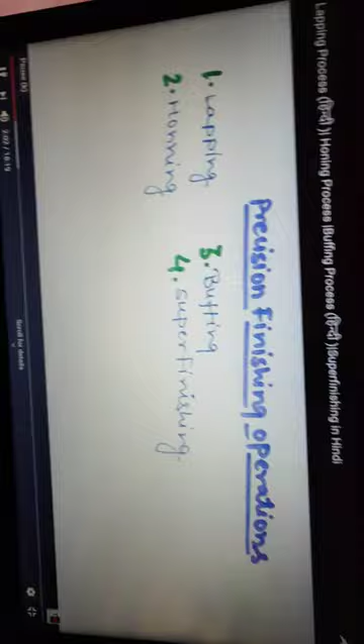So today we are going to discuss precision finishing operations, that is lapping, buffing, honing, super finishing, etc. Super finishing is an operation which is done after manufacturing of a product.

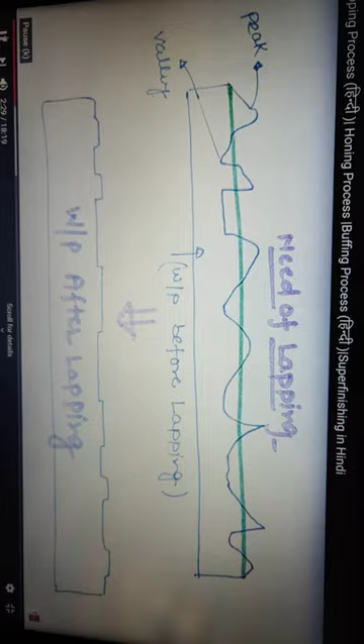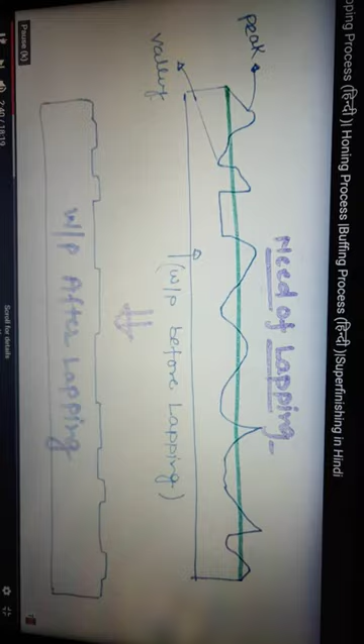So look at this. Why do we need lapping? The workpiece before lapping and the workpiece after lapping. You can see the major difference. The peaks and the valleys are shown clearly before lapping, and after lapping it is plain, or it is neutralized. You can see the difference between the workpiece before lapping and after lapping. It is a major difference that you can see in this picture.

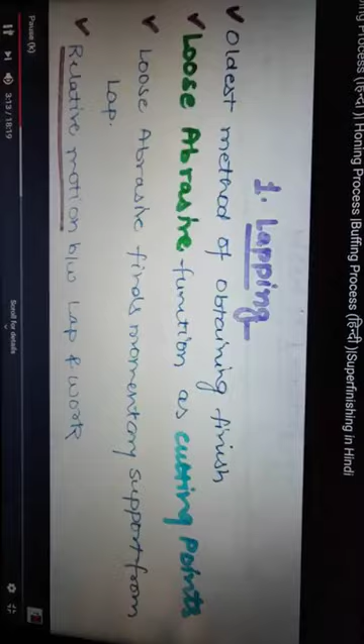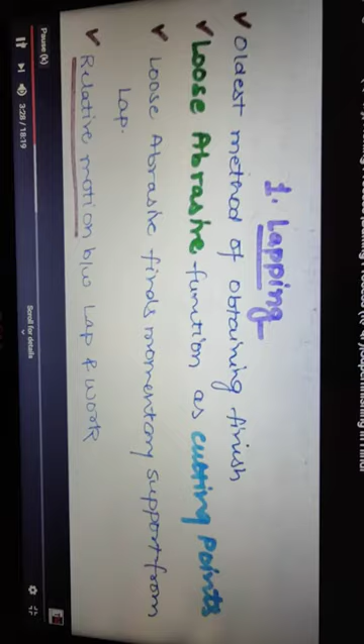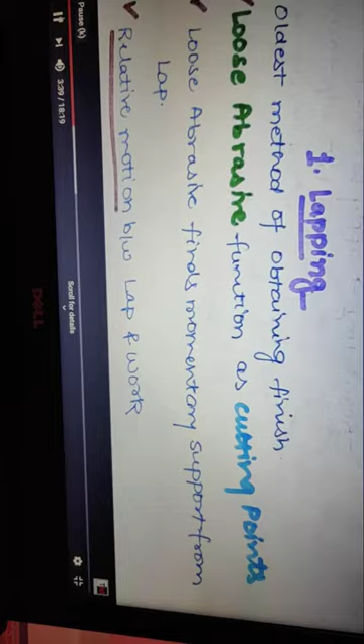Why do we need lapping? You can see very clearly the peaks and valleys in the first picture, and it is clear after lapping. So lapping is the oldest method of obtaining finish; loose abrasive functions as cutting points. Loose abrasive finds momentary support from the lap, with relative motion between lap and work. So lapping is the oldest method of obtaining finish.

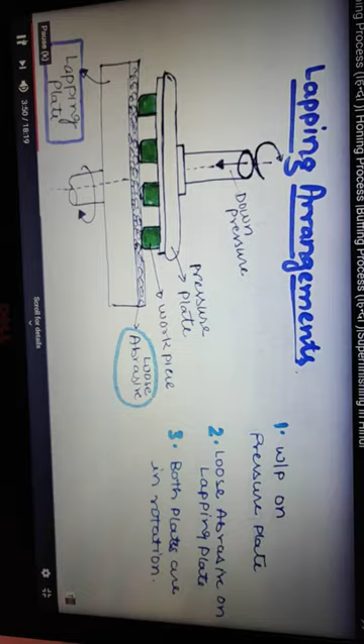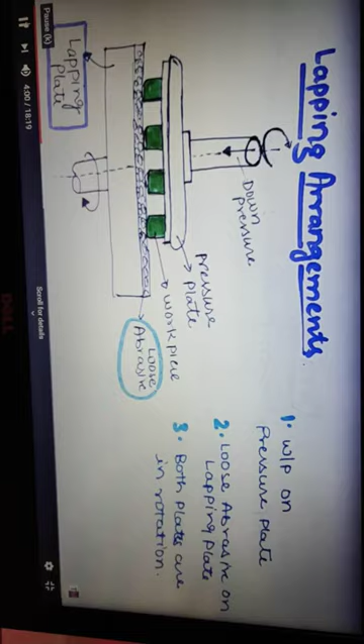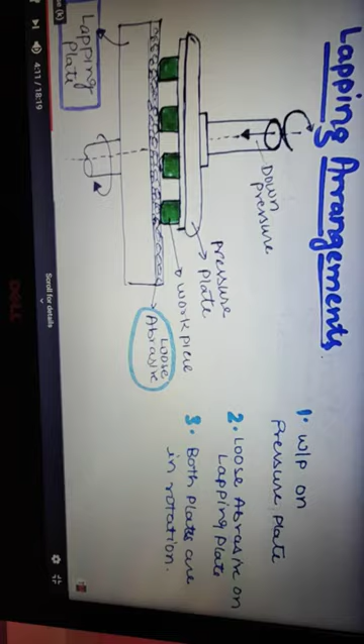So the lapping arrangement is shown in the figure. The green color indicates the workpiece, the upper side is the pressure plate, applying down pressure. In the workpiece there is a loose abrasive. So when the workpiece rotates in the loose abrasive, it gets plain. So it gets a super finish.

So number one is workpiece on pressure plate, number two is loose abrasive on lapping plate, number three is both plates in rotation. So both plates are in rotation, in between the workpiece is located, and the workpiece gets plain after this lapping arrangement.

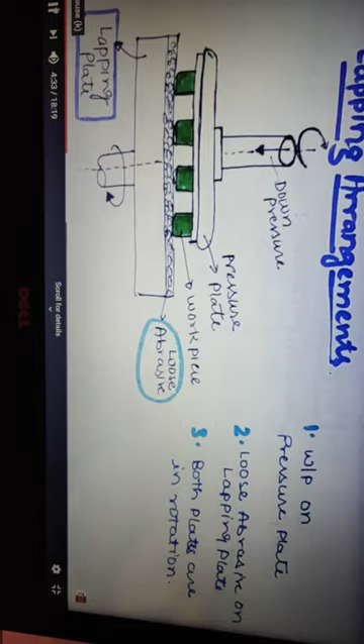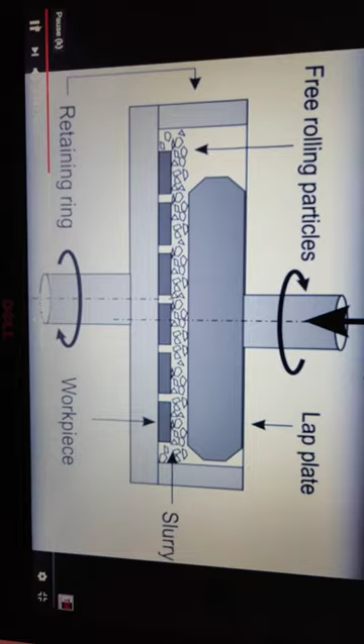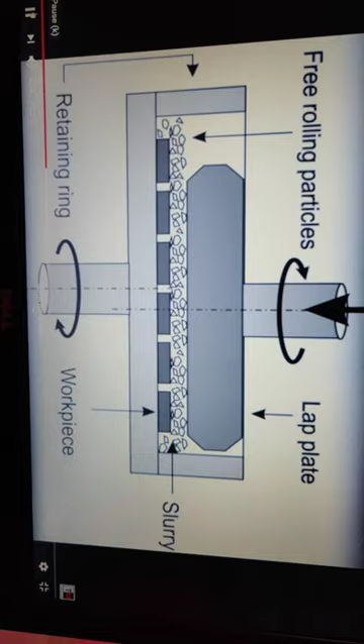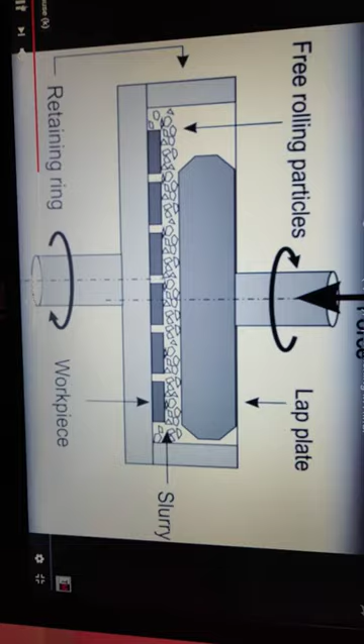In the second picture, you can see clearly the slurry is contained in a retaining ring. The upper is a lap plate with free rolling particles, and below the slurry there is a workpiece. The lap plate gets pressurized into the workpiece under the slurry, which normalizes the workpiece and clears the rough area, and we get a super finished product. So by the retaining force of the lap plate we can use the slurry to continue the process.

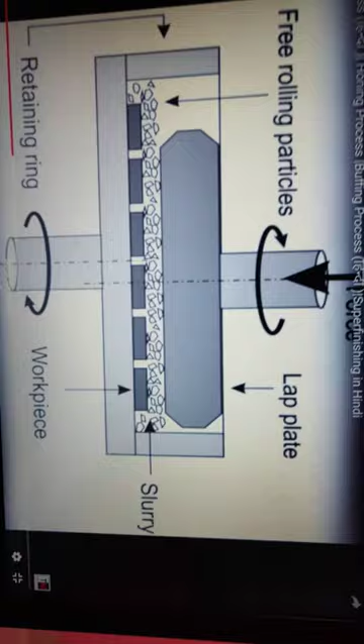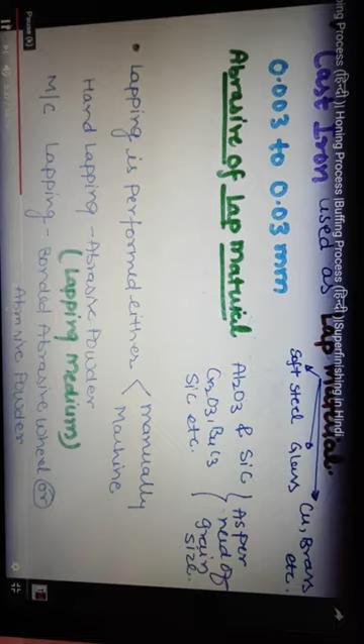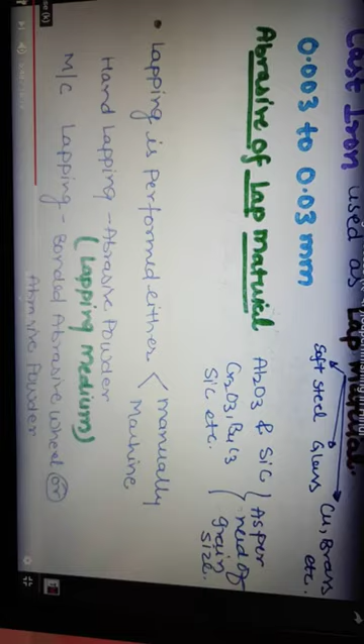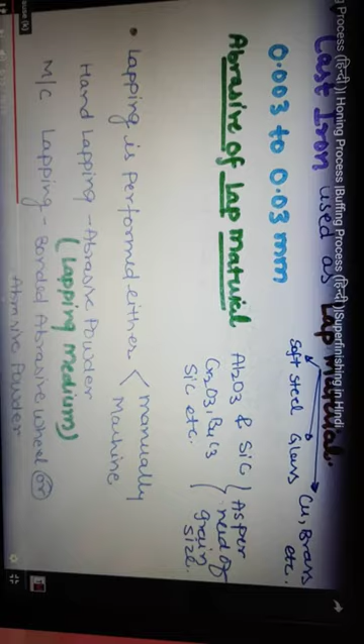Lap materials are made of cast iron, soft steel, glass, copper, brass, etc. Its point of contact is 0.003 to 0.03 mm. Abrasives of lap material are Al2O3, silicon carbide, chromium oxide, etc. as per need of grain size. Lapping is performed either manually or by machine. Hand lapping uses abrasive powder as lapping medium; machine lapping uses bonded abrasive wheel or abrasive powder. These are the main construction features of a lap. So according to the need we can choose different grain size and lap material.

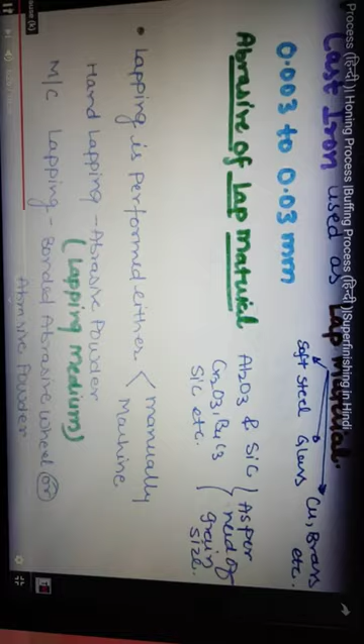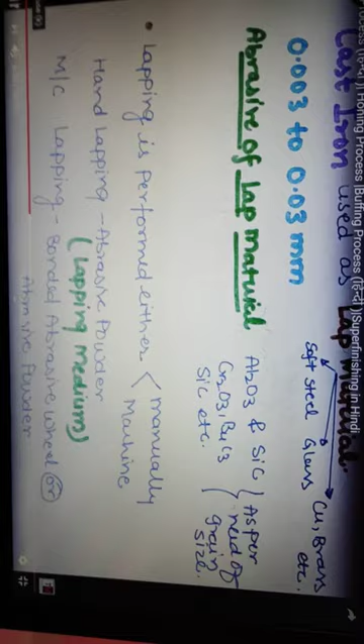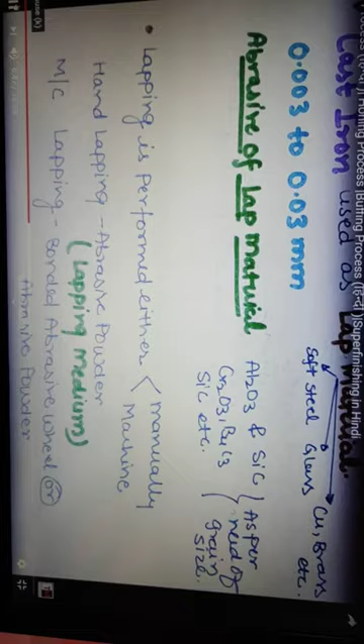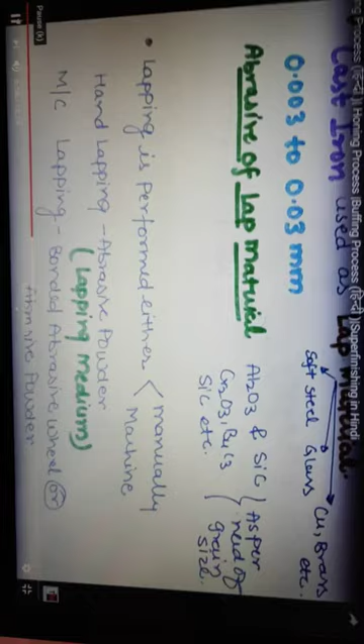The lap can be used either manually or by machine. In hand lapping we use abrasive powder. In machine lapping we use bonded abrasive wheel or abrasive powder. As in a grinding machine we use a bonded abrasive wheel, in the lapping machine we use a bonded abrasive wheel or abrasive powder. But in hand lapping we use abrasive powder. It is the major difference between hand lapping and machine lapping. You can see clearly, it is mentioned here. You get the point to choose the lap material.

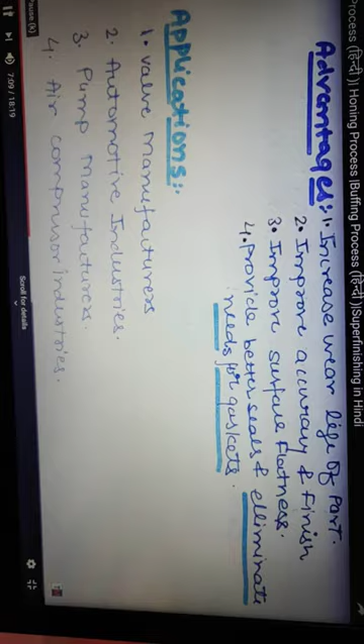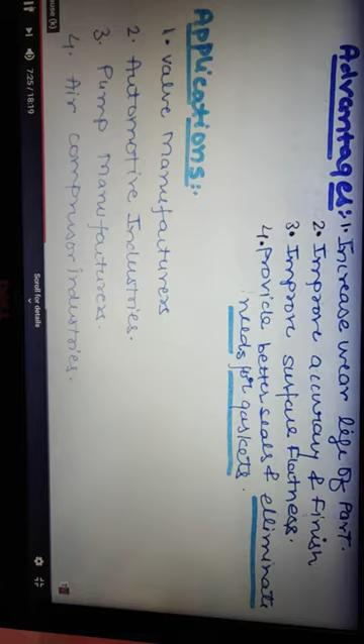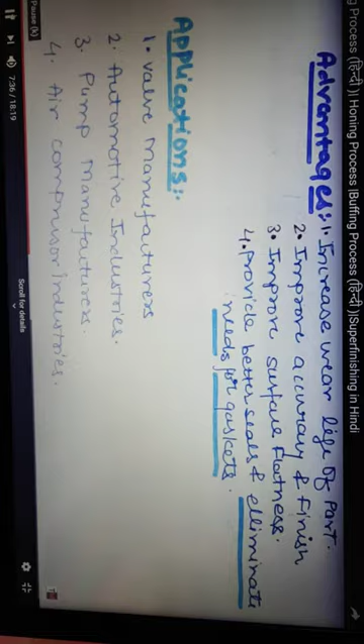Second, advantages and application. Advantages are increased wear life of parts, improved accuracy and finish, improved surface flatness, better seals, and it eliminates the need for gaskets, etc. Now come to the application. It is applied in valve manufacture, automotive industries, pump manufacturers, air compressor industries, where high precision is needed. We use this type of surface finishing operation. So these are the main important parts you have to remember.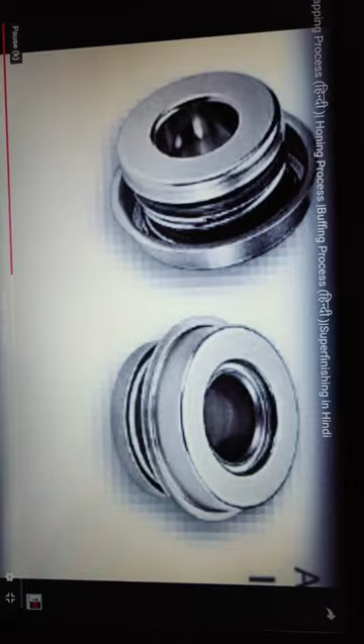Now see how lapping is used in the valve manufacturing process. You can see the inside parts. Valve manufacturing, automotive industries, air compressor industry and electronic industries. How the product is finished by using a lap. So see how the manufacturers are using this type of thing.

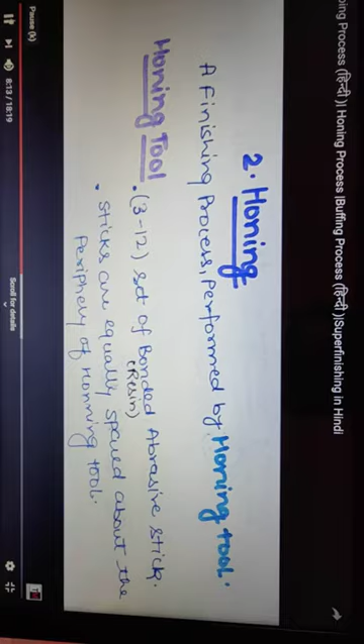Now second is honing, a finishing process performed by a honing tool. 3 to 12 sets of bonded abrasive resin sticks are equally spaced about the periphery of the honing tool. So it is a honing tool around which the sticks are equally spread around the periphery. So see, the sticks are shown on the material.

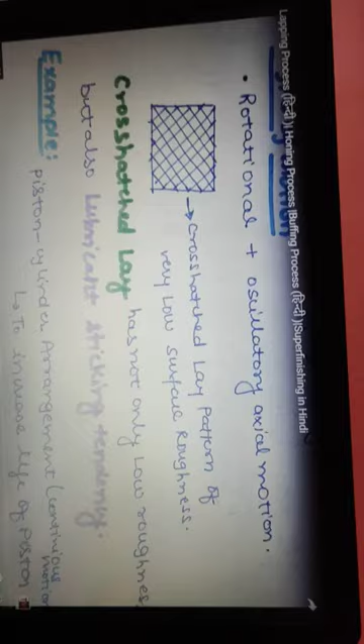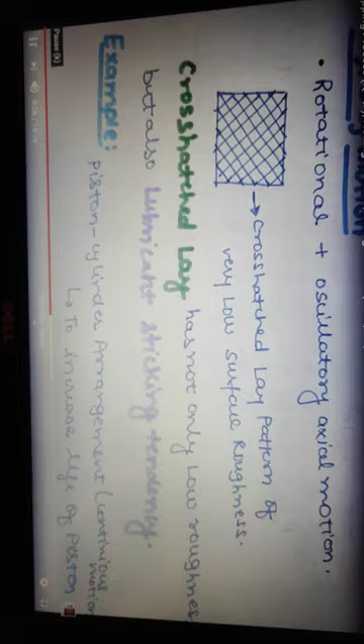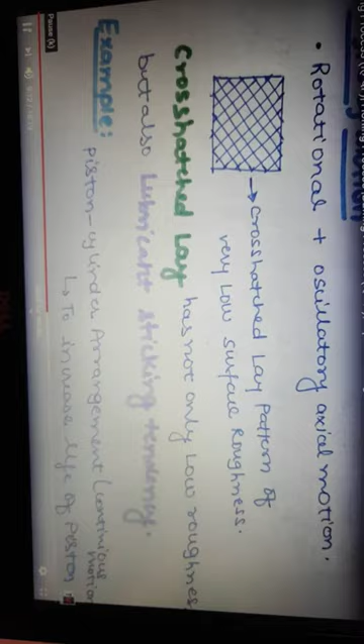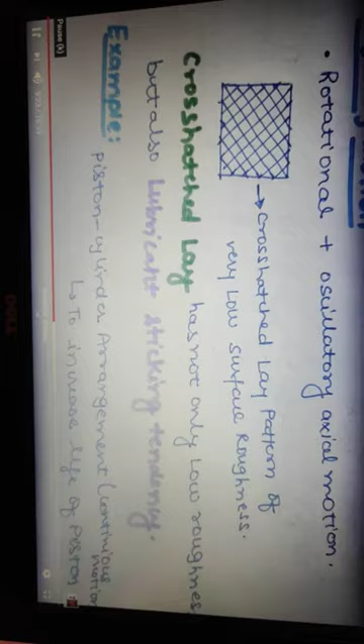The types of motion are basically rotational plus oscillatory axial motion, giving a cross hatch lay pattern of very low surface roughness. Cross hatch lay has not only low roughness but also a lubricant sticking tendency. Example, piston cylinder arrangement, continuous motion to increase life of piston. It is used because lubricant sticking tendency is very necessary in this type of surface.

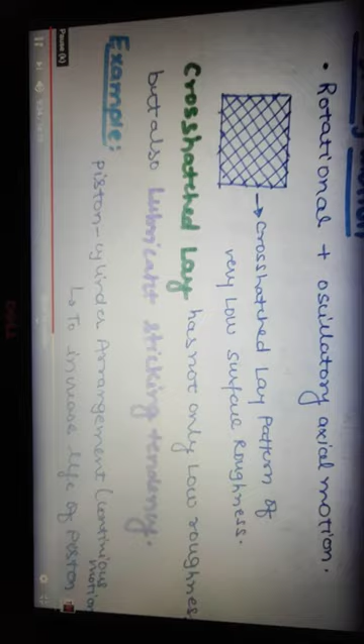There are two types of motion: rotational plus oscillatory axial motion. So honing produces a cross hatched lay pattern, because lubricant sticking tendency is very needed. For example, you have the piston cylinder arrangement, continuous motion to increase life of piston.

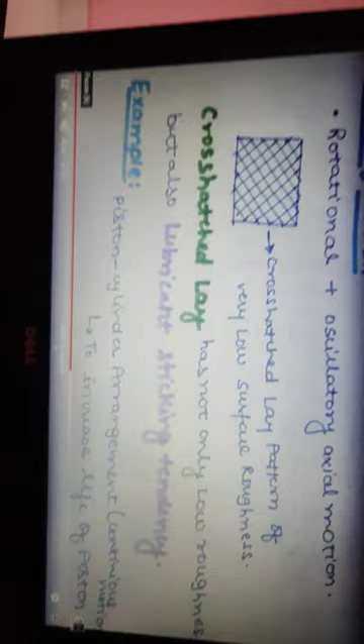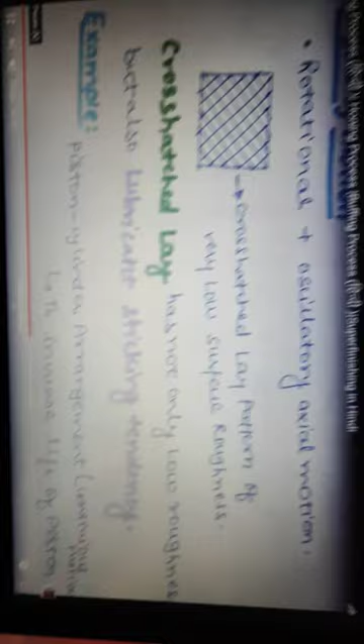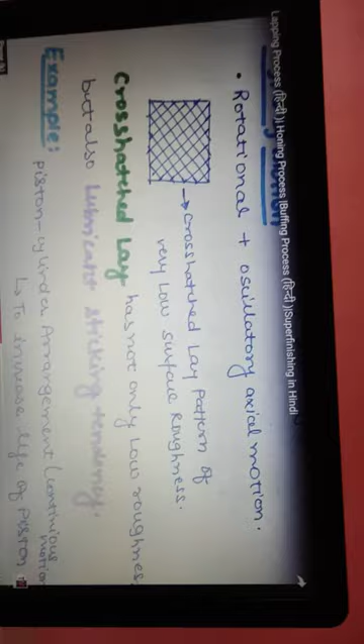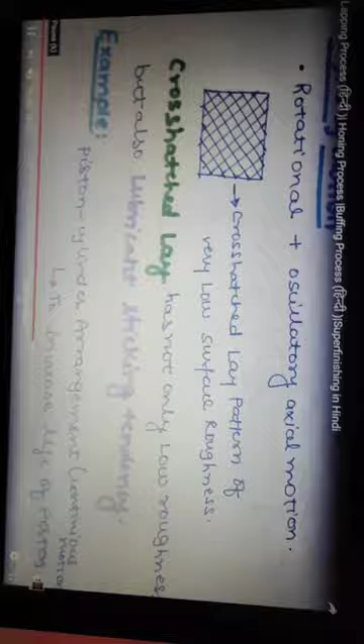Note it very clearly. Rotational plus oscillatory motion are used in this type of motion. Cross hatch lay pattern of very low surface roughness. Okay, so the sticks are equally spread on equal periphery of the surface of the material.

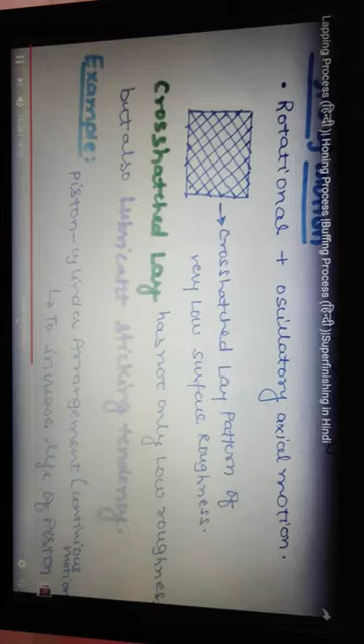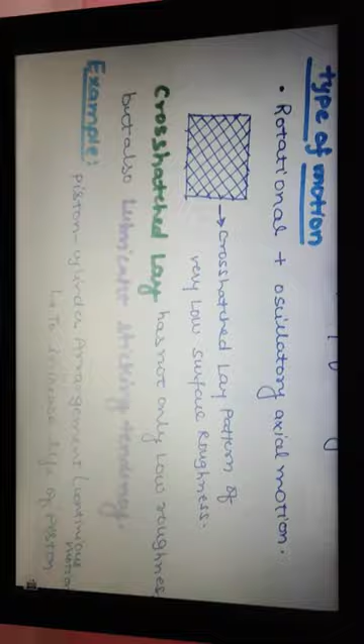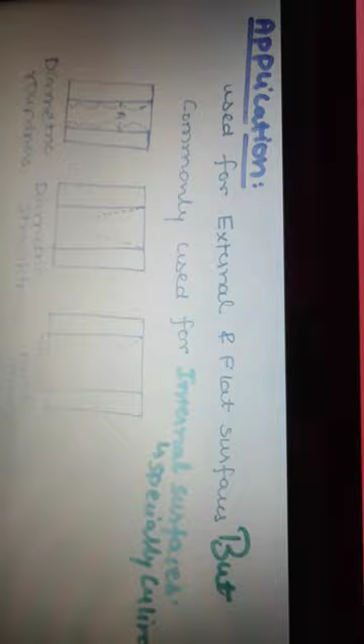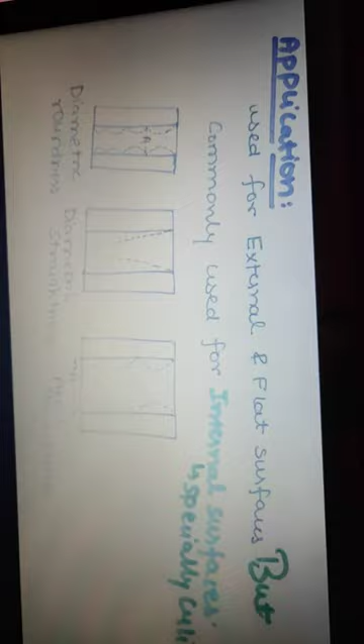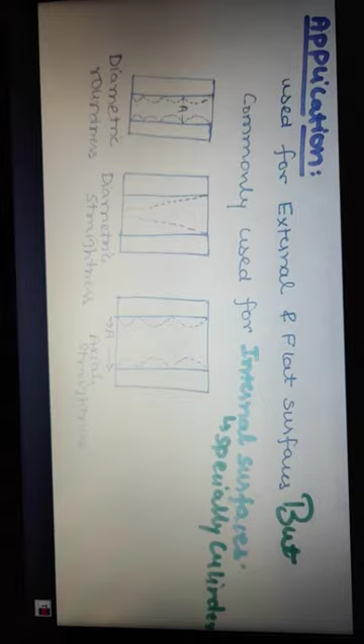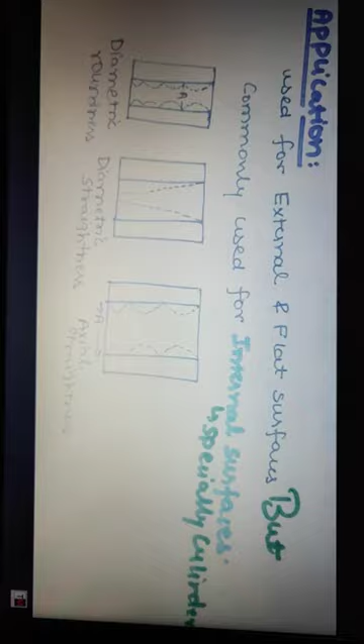Application: used for external and flat surface but commonly used for internal surface, especially cylinder. You can see it is for diametric roundness, diametric straightness, axial straightness. So these type of operations are used. So it is basically the application of honing tool. Okay, please note that it is used for external and flat surface but commonly used for internal surface, especially cylinder, diametric roundness, diametric straightness and axial straightness.

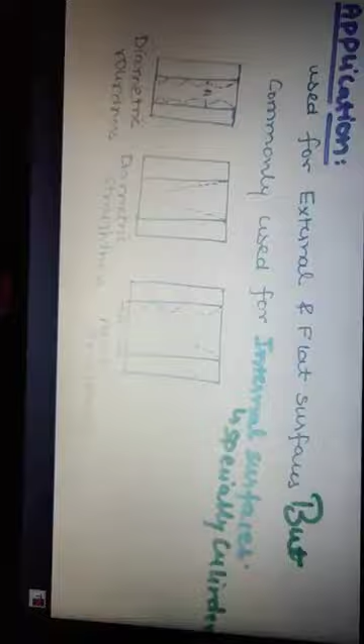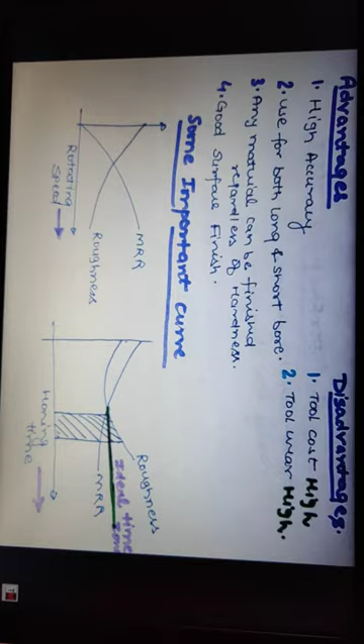So next we come to advantages and disadvantages. Advantages are high accuracy, used for both long and short bore. Any material can be finished regardless of hardness, good surface finish. Disadvantages are its cost, tool cost is very high and tool wear is very high.

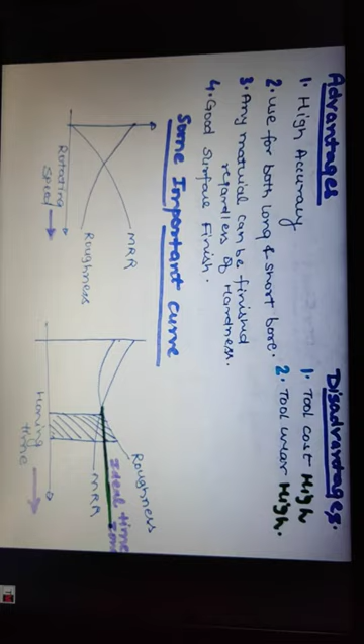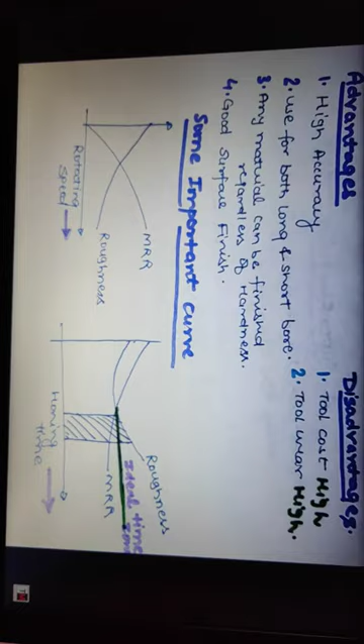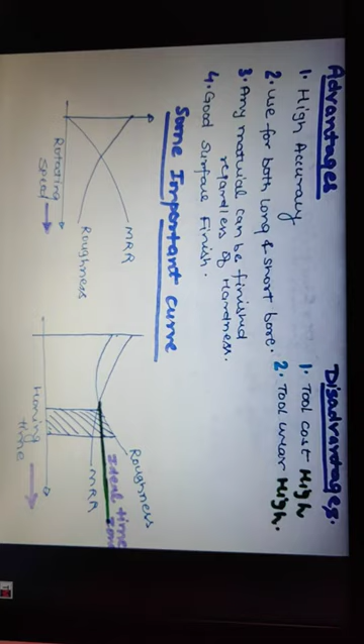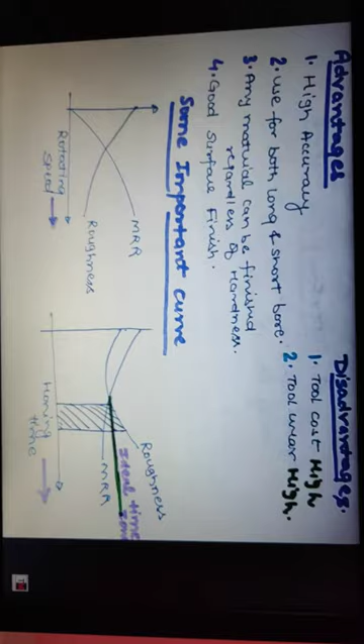Okay, so you have to know the advantages and disadvantages. It is very important in exams. And second is the important curve. You have to know how the material removal increases when roughness decreases. It is basically this type.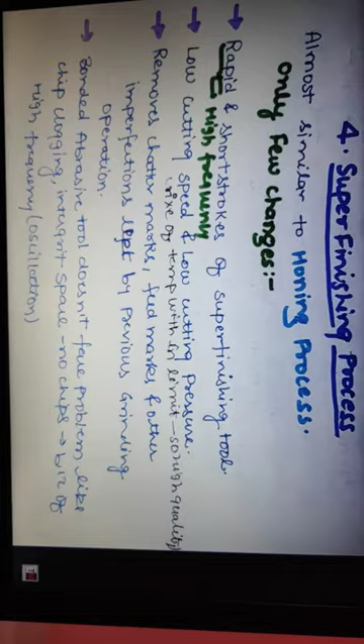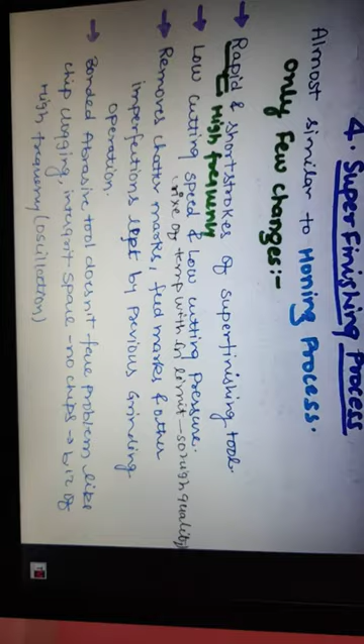Second, we come to the super finishing process. It is almost similar to honing process, only few changes. Rapid and short strokes of super finishing tool, high frequency, low cutting speed and low cutting pressure, removes chatter marks, feed marks, imperfections. Bonded abrasive tool does not face problem like chip clogging, no chips, because of high frequency oscillation. Okay, it removes chatter marks, feed marks and other imperfections left by previous grinding operation.

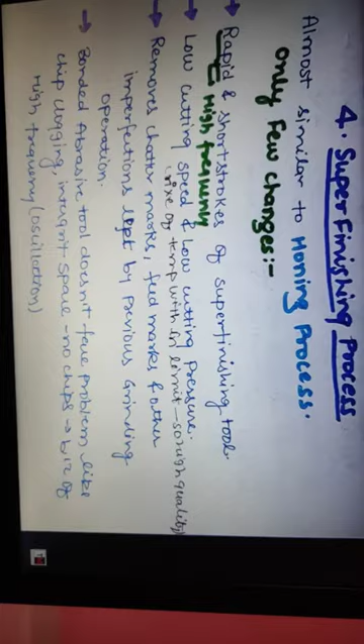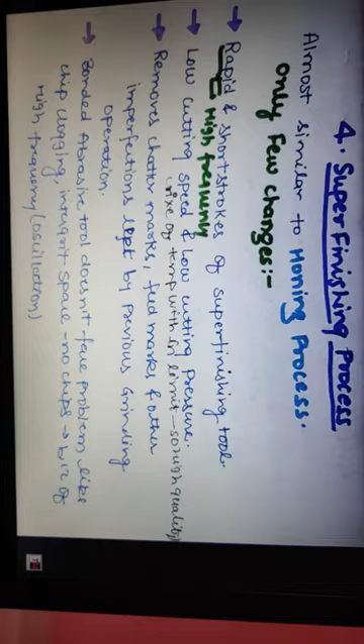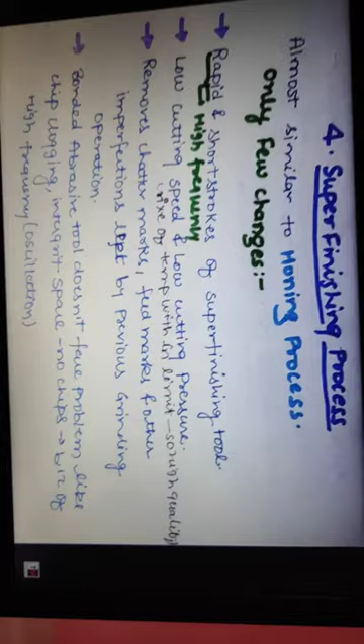After grinding operation, we have to do super finishing operation. It is very much similar to honing process, only few changes that are listed below. Okay, you have to note it and use according to the need of material. Bonded abrasive tool does not face problem like chip clogging, because of high frequency oscillations, etc. We have to know what are the differences between honing process and super finishing process.

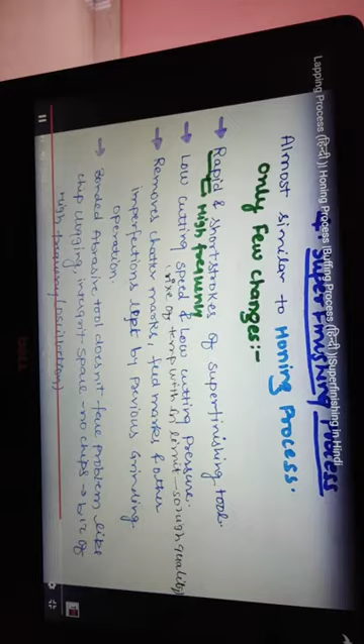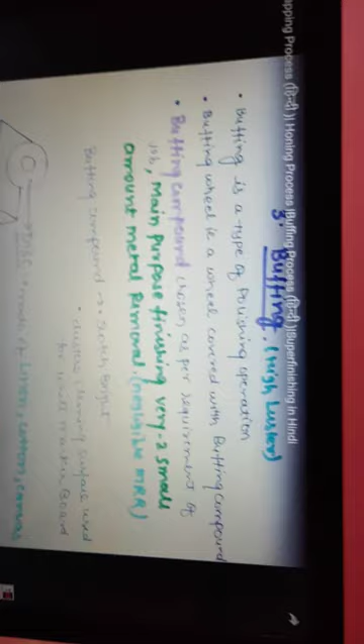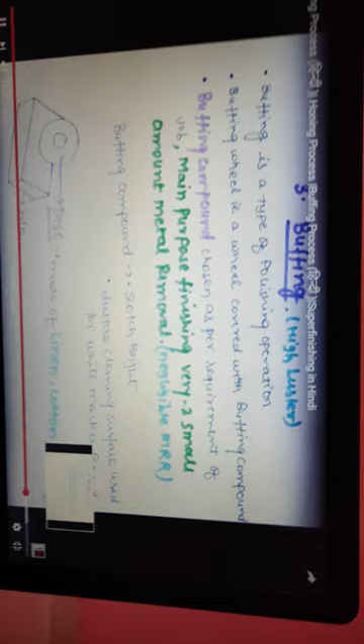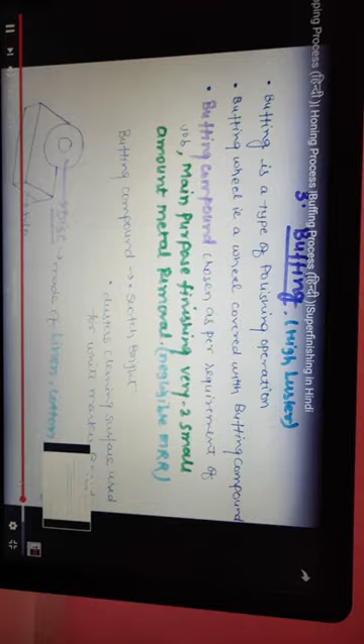So next comes buffing. Buffing is a high luster precision machining operation. Buffing is a type of polishing operation. Buffing wheel is a wheel covered with buffing compound. Buffing compound is chosen as per requirement. Main purpose is finishing, with small amount of metal removal, like negligible MRR. Buffing compounds, like Scotch-Brite or a duster cleaning the surface used for whiteboard. How we use Scotch-Brite in cleaning the utensil just to clean it, similarly, buffing is also used to clean the abrasive particles from the material.

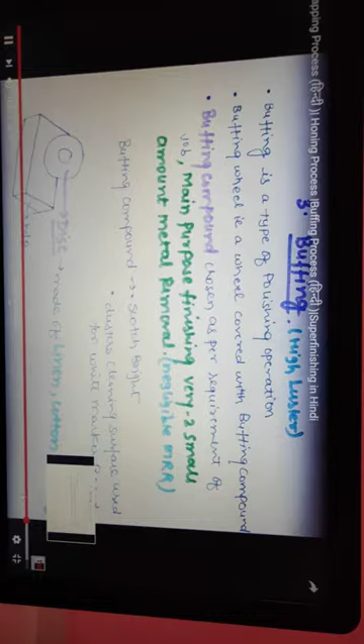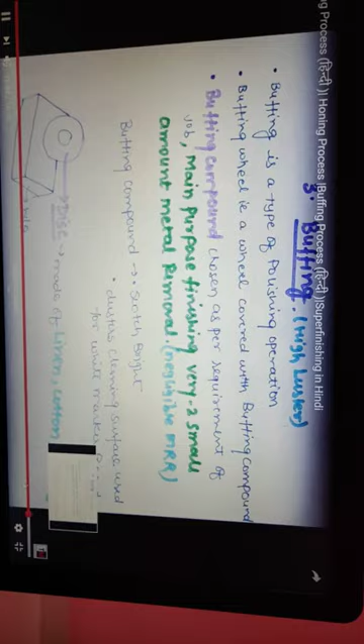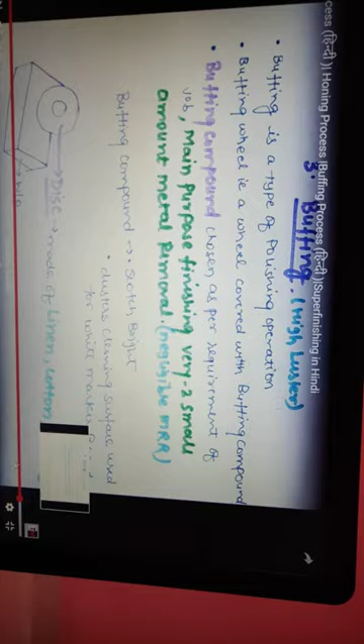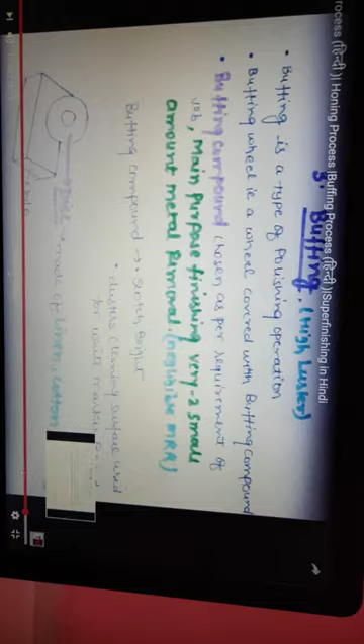And when we use a duster, we clean the surface. So similarly, it is made of disc of linen or cotton which is pressed against the metal to remove any type of imperfection and make it super finish. Okay, buffing is a type of polishing operation. Buffing wheel is a wheel covered with buffing compound. Buffing compound is chosen as per requirement of job. Main purpose is finishing, very small amount of metal removal, negligible metal removal rate. Here we do not need to remove metal.

Look, these are the buffing wheels which are made of linen, cotton or other product. They are pressed against the workpiece to remove the surface roughness. Okay.